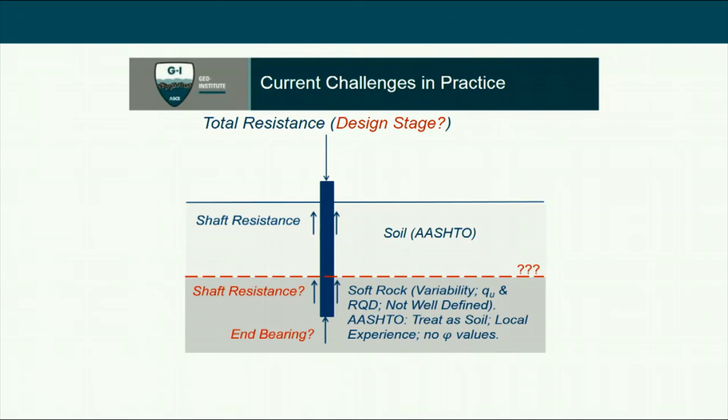This creates challenges if you want to estimate the shaft resistance and end bearing in this IGM material, and creates an unknown at the design stage regarding the total resistance of a pile driven into this geomaterial.

In current practice, the performance of the pile relies on construction control methods, for example using the wave equation, PDA and CAPWAP, or restrike, and maybe even static load tests, to verify the performance of the pile driven into the IGM material. Based on our experience, we found that even with construction control methods, the LRFD strength limit state cannot be satisfied, and that leads to some challenges during construction.

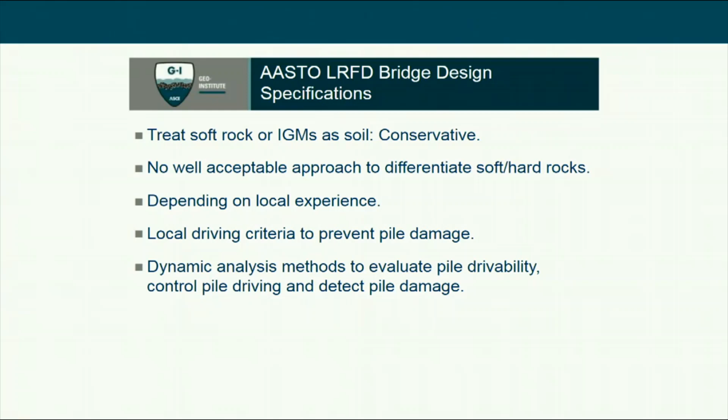We have conducted a literature review. So the AASHTO specifications treat soft rock or IGM as soil material. There is no well-defined, acceptable approach to differentiate soft versus hard rocks, depending on local experience. Local driving criteria are recommended to drive the pile to prevent pile damage. Dynamic analysis methods are recommended to evaluate pile drivability, control pile driving, and detect pile damage.

So we conducted a survey on the state DOTs to determine if any state DOTs in the United States have special provisions to define rock, IGM, and soil materials, especially IGM material. We found that only a few states have some sort of provision to describe IGM, but most states do not have a definition or description of IGM.

For those few states, they have specific criteria, specifically for driven piles. For example, PennDOT defines soft rock based on UCS values less than 1,000 KSF. Montana, again, based on UCS. Iowa DOT relies on SPT N value. NC DOT uses blow counts. SC DOT, again, based on RQD values.

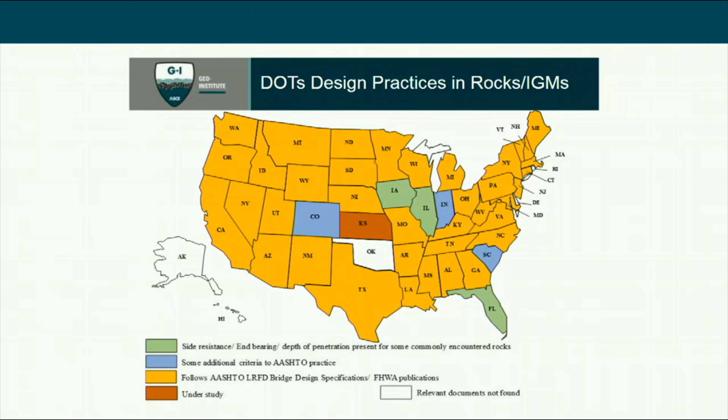In terms of state DOT practice in designing piles driven into IGM materials, as you can see, there's only maybe 3 states that have come up with a method or approach to estimate or provide estimations of pile resistance, and most states will just rely on AASHTO specifications for design practice.

So for those 3 states, like Illinois DOT, they have conducted load tests on selected limited project sites to obtain data and come up with methods to estimate shaft resistance and bearing for the geomaterial.

Iowa DOT has what we call the blue book, which gives recommended values of shaft resistance and end bearing for piles driven into rock material. Florida has their own program that includes estimations for end bearing and shaft resistance in those materials.

Some other states may have additional provisions in addition to AASHTO. For example, CDOT simply says that if your pile penetrates more than 3 feet into the rock, we consider that soft rock; if it's less than 3 feet, then consider it hard rock. But when you have hard rock, the structural capacity will govern the design.

Indiana DOT will limit their nominal resistance to about 65% of the yield strength of steel, and factored resistance to about 46% of the yield strength of steel. So those are their guidelines. South Carolina DOT says that if you have RQD greater than 10%, then we use the structural capacity as the governing limit state equation.

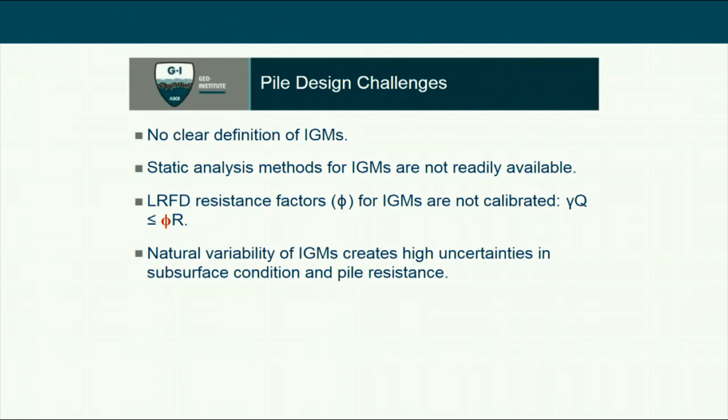So in terms of the challenges during the pile design stage: there's no clear or consistent definition of IGMs. Static analysis methods for IGM are not readily available to estimate resistance. And the LRFD resistance factors for IGM are not calibrated—in other words, there are no recommended resistance factors for this kind of geomaterial, especially since IGM materials are highly variable, which creates a lot of uncertainty in estimating pile resistance.

That leads to challenges during construction because of the limitations in the design stage, resulting in a high discrepancy between the estimated and measured pile resistance. In some cases, you may not have an estimate and just rely on construction control to determine pile performance. Very often, as we see from Wyoming, the LRFD strength limit state could not be satisfied during construction. High uncertainty in pile performance leads to many challenges during construction—possibly higher construction cost and duration, and potential conflict between owners and contractors.

So over the past 4 years, I have gathered data from Wyoming DOT based on projects with piles driven into IGMs. Based on these 15 projects, with a total of 104 production piles, we found that if we use the wave equation as the construction control method at the end of driving, only about 28 production piles satisfy the LRFD strength limit state, or only about 28%.

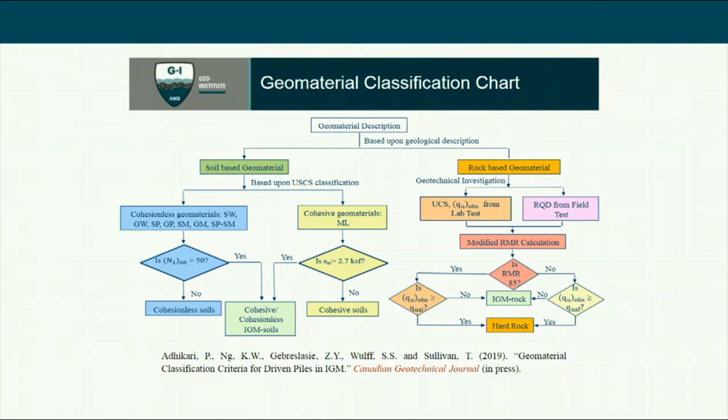If you have a fractured rock with RMR less than 85, then you have to compare the measured UCS versus the QUSF. So with that logic, we're able to determine whether this material is considered an IGM rock or hard rock.

So we have developed a series of charts to determine the QUSI, the limit for the intact rock, to differentiate IGM versus hard rock based on the percent of pile resistance and the pile type.

And we also have developed a series of charts for QUSF to determine the limit of the UCS value based on the RMR value and the percent of total resistance, to differentiate the IGM material versus the hard rock. You can find more about this in our publication in the Canadian Geotechnical Journal.

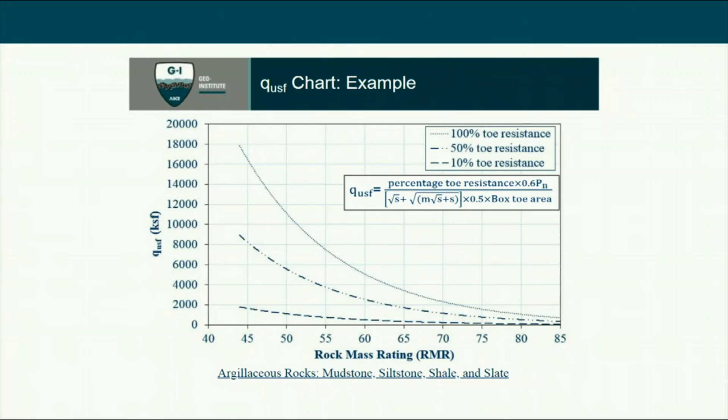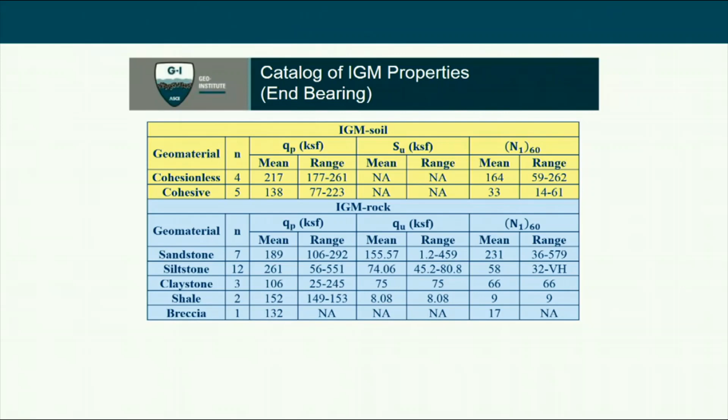So with the data we have from Wyoming DOT, we're able to calibrate some static analysis methods. For example, for IGM soil, we have calibrated the alpha method to estimate the shaft resistance in terms of undrained shear strength. For IGM rock, we're able to calibrate the alpha method in terms of uniaxial compressive strength, and the calibrated beta method in terms of friction angle, to allow people to estimate the shaft resistance based on measurable parameters.

They also developed a calibrated alpha method and beta method for estimating the unit end bearing for IGM rock materials - alpha method in terms of the uniaxial compressive strength, beta method in terms of the friction angle.

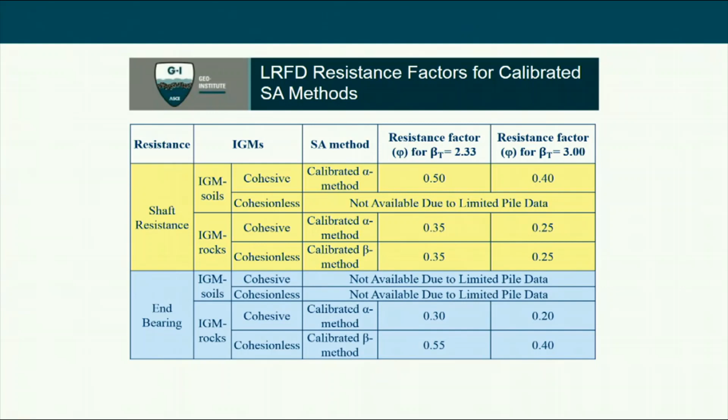With those measurements and calculated resistance, we are able to come up with calibrated resistance factors using FORM and Monte Carlo simulation methods, based on the AASHTO specifications, with a reliability index of 2.33 for redundant pile groups and reliability of 3.0 for non-redundant pile groups. Those calibrated resistance factors are, in fact, reasonable - in some cases better than what is shown in the AASHTO specification.

And also come up with recommendations about how you will use the wave equation analysis program. You have a pile driven into an IGM.

We recommended that if you have a soil material or geomaterial with N160 less than 60, you use the N value as an input. If it's greater than 60 for the IGM soil and IGM rock, cohesionless, you use friction angle and unit weight as input. And for cohesive IGM and soil and rock, we'll use UCS and unit weight as the input to the IGM.

We also consider two cases about how to properly define the toe quake values in the wave equation. Case one is using the toe quake values generated by the wave program, and case two is using D over 120 for IGM soil and 1 millimeter for IGM rock to define the toe quake value.

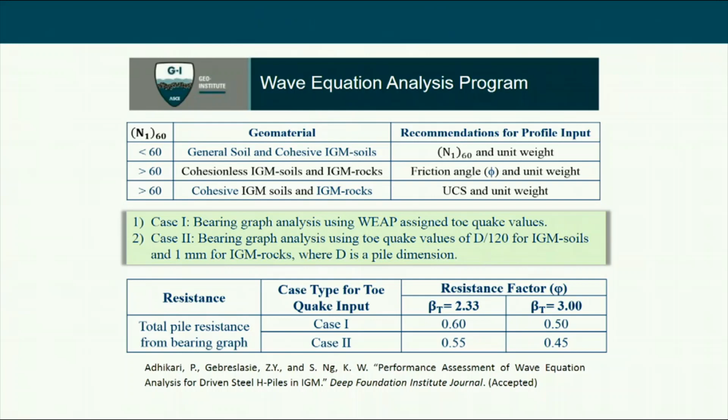We have also come up with calibrated resistance factors for the wave equation for piles into IGM. Case one with 0.6 as the resistance factor, and case two will be 0.55 for the resistance factor.

So those are the study outcomes based on only the Wyoming data. This year we begin a pooled-fund study to expand the study to cover more states, to investigate the pile performance and the recommendation to develop LRFD recommendations for piles driven into intermediate geomaterials.

Seven DOTs participate in this pooled-fund study. This is a study for 5 years, starting this year, 2019, expected to complete in 2023. We hope that with this study, we can provide a better, more representative recommendation to develop the LRFD recommendations for driven piles into IGM.

So if you have any questions, you can feel free to contact me. That's my contact information right there. And also, I have included a list of references here that we have written in the past few years, all about piles driven into IGM materials.

All right, that's all I have. Let's see whether there's any questions. No questions, so to save time, I will move forward to the next speaker.

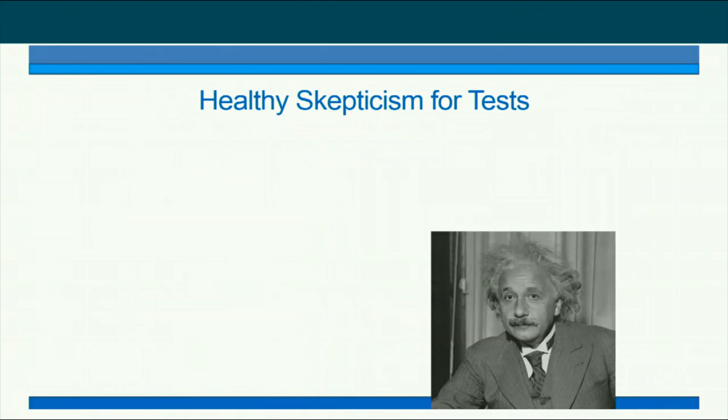But not all tests are equally valid. We have to have a healthy skepticism for tests. Albert Einstein is reported to have said, a theory is something nobody believes except the person who proposed it.

An experiment or a test is something that everybody believes except the person who performed it. You may have some tests like that yourself where you're not sure that everything was done properly, that the strain was measured right, or that the samples were undisturbed. So we have to be careful.

We're looking at a situation where we have abutment piles near MSE wall faces. It used to be typical to have a slope in front of the piles. More commonly now, we have a vertical face, and to keep that stable, we have thin concrete panels reinforced by metallic or geosynthetic reinforcements extending back into the fill material.

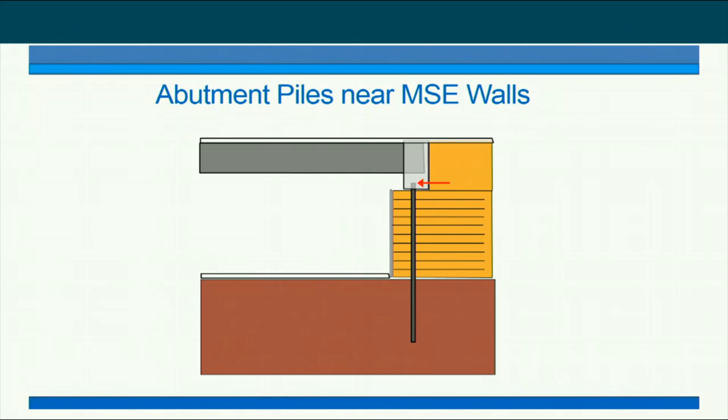Our concern then is, when we're looking at lateral resistance, what kind of resistance would we have, and what kind of displacement and tensile force might we apply to the pile and to the reinforcements?

There's different approaches, as we looked at the 11 state DOTs we're working with, to account for this. The geometry will have H as the effective wall height, the length is the length of the reinforcement, and S is the spacing behind the wall from the back of the pile to the center of the pile, or back to the wall to the center of the pile.

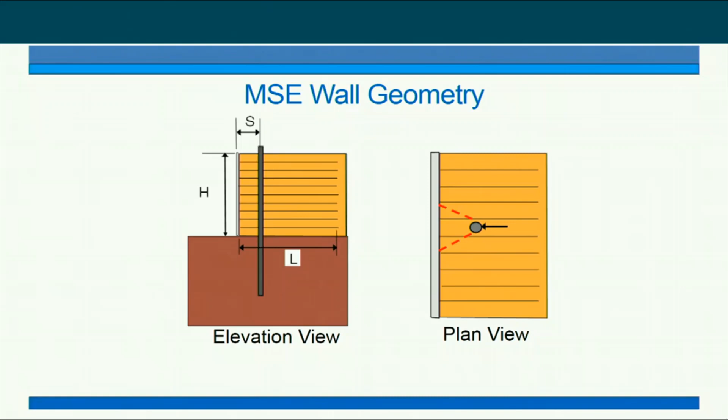Here we're looking at 2 conditions. As the pile is loaded laterally and impinges on the wall, does the wall cause a decrease in lateral pile resistance? And secondly, does the pile load increase the force on the reinforcements? So these are the things we're concerned with.

Different state DOTs have different approaches. Some states like Texas, Florida, and Massachusetts ignore the soil resistance, so you have a flagpole loading. The consequence of that is you have to either have larger piles or more piles, and that in turn increases the cost of the piles for the project.

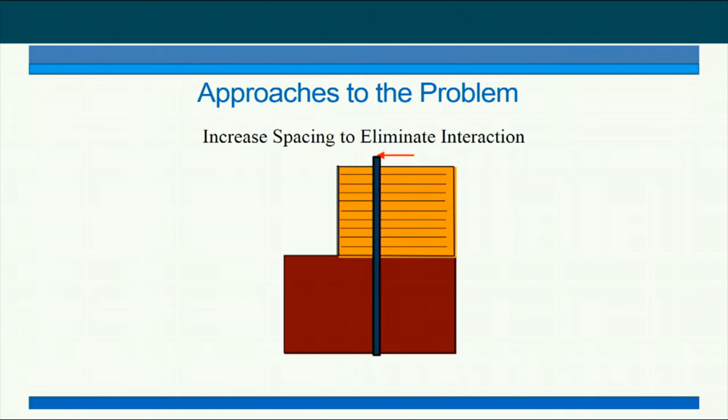Another alternative is that maybe they would say, let's move the pile far enough back from the wall face so that we eliminate the interaction effects. So how far does that need to be? Some people say 6 diameters, 8 diameters, something like this. If we move the piles further back, this increases the cost from a larger bridge span, which can be important.

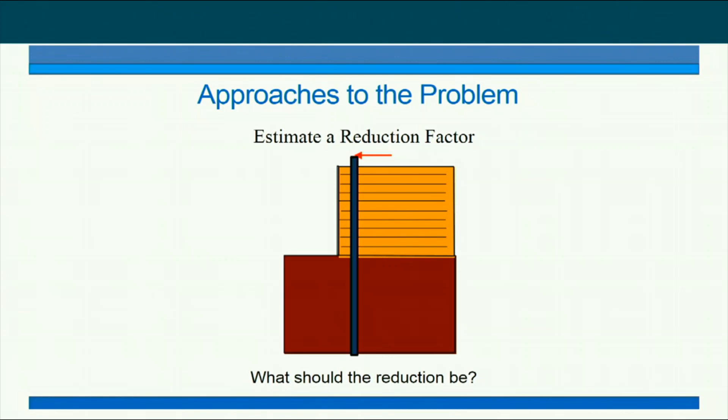Other people have said, let's have some reduction factor that accounts for the reduced lateral resistance you'd have due to interaction with the wall. The question is, what should that reduction factor be? So some of you use finite element modeling and other techniques or judgment to estimate a reduction factor.

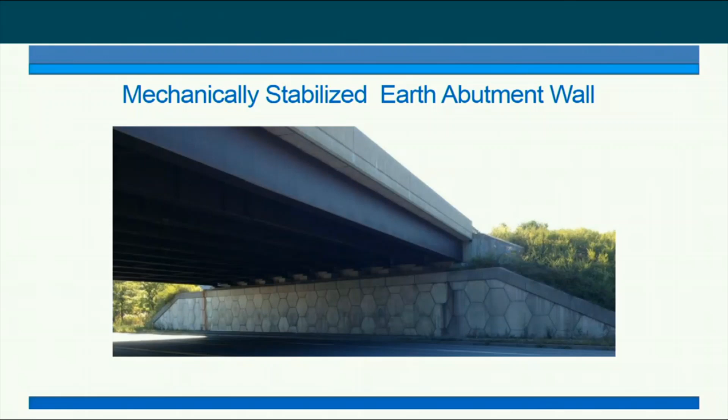It's hard to do things that are under construction, so we tried to find a case where we could actually build our own wall. We're trying to look at a case like this wall in Buffalo, New York, where we have an MSE wall face and the bridge deck with the approach fill located behind it.

So we found a test site in a gravel pit where we could build a wall that was 20 feet high and 100 feet long. We're looking at 24 different tests with round, square, and H piles at pile spacing 2D to 5D behind the wall.

So this is our layout, a comparison of what we would see in the field, where we have an approach fill and the abutment overlying the top of the reinforced section.

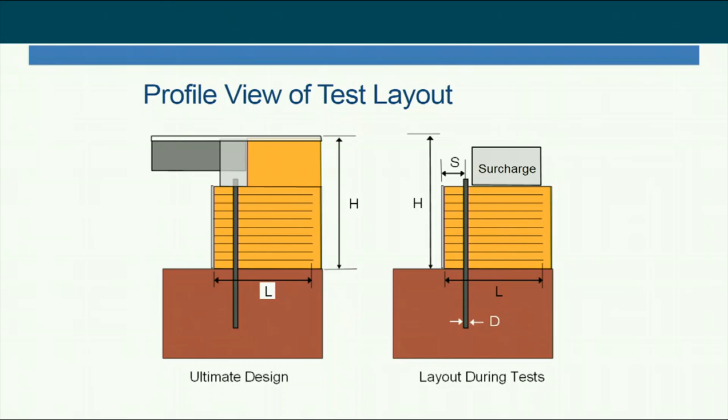In our case, when we're doing the test, we don't have the abutment in place. So to simulate that situation, we're actually putting some surcharge loading to produce about 600 PSF pressure behind the wall to simulate this surcharge weight.

So this is our test foundation, and we are putting the surcharge back behind the wall, or behind the piles that we're testing. The piles in our case extend 20 feet below the base of the wall, so they're long piles, 12 inches in diameter.

This is a cross section through the geometry of the pile. We've got the surcharge placed here, and the reaction piles are located behind the reinforced section so that they don't have any impact on the lateral resistance. Then we are applying load like this to move the pile towards the wall face.

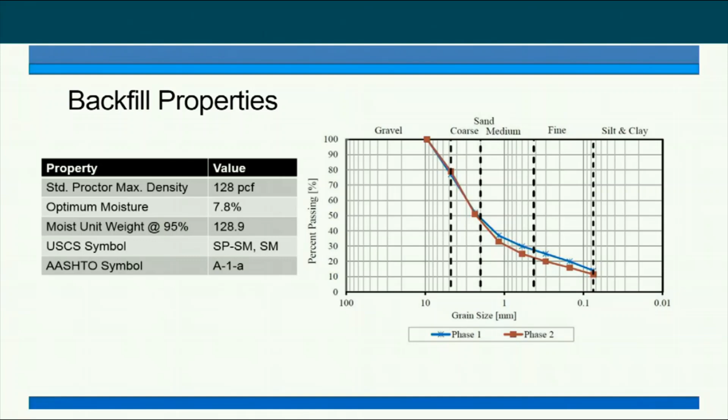This is the plot of the backfill properties. We've got maybe 20% gravel, 60 to 70% sand, and maybe 10 to 12% fines in the mixture, non-plastic silt.

We are doing the test geometry in this arrangement. On one side of the wall, we have rib strip reinforcements; on the other side, wire mat or welded wire reinforcement. All the piles are about 12 inches in diameter, pipe piles, H piles, and square piles. In this case, they're made of steel so that we don't have variations in interface strength.

So what we did is built the wall up to 15 feet in height, and for the effective length on the reinforcements, which are 18 feet behind the wall, we have an L over H of about 0.9. So we did tests here with walls with piles.

We did the test on piles way behind the wall first, and then we did tests on the round or circular piles behind the strip reinforcement, and another set of tests behind the walls with the piles in the welded wire reinforcements.

Then we did tests with piles on the H piles. Then we added another 5 feet of soil, another wall panel.

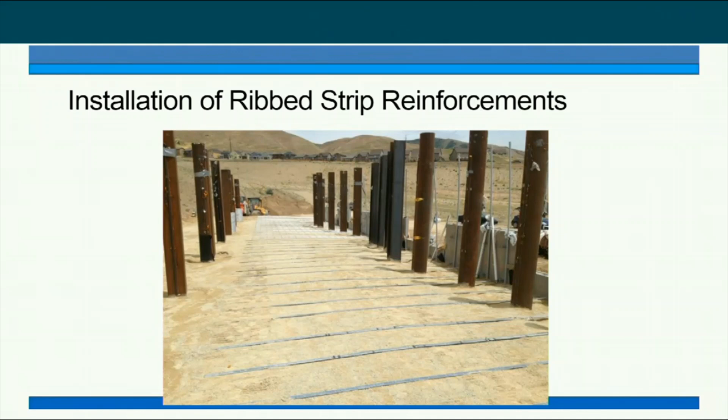Here's a photograph of the rib reinforcements. We have the strain gauges going along the length of the reinforcement, so we can look at the distribution of load in the reinforcement. We also have reinforcement at different distances transverse to the loading, so we could look at the effect of reinforcement load at different locations.

Here's the welded wire reinforcement. This one had strain gauges close to the pile, and this was further transverse to the wall.

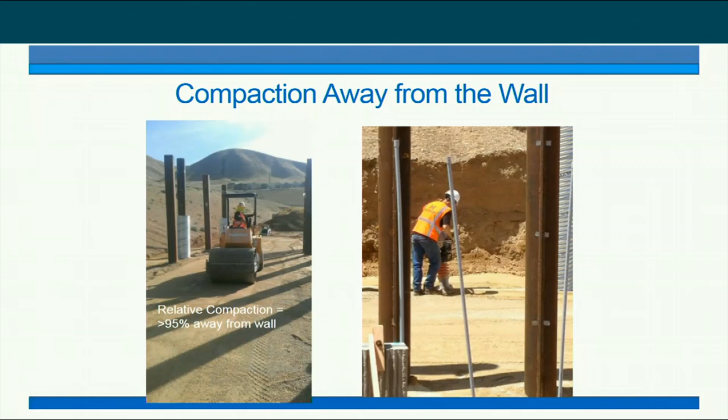Here we did the compaction. We could use a roller compactor device, and we got 95% of standard Proctor away from the wall. Near the wall face, it's very typical to limit your compaction to a plate compactor, and more typically then we got 88 to 94% near the wall face, which is more typical of practice in constructed works.

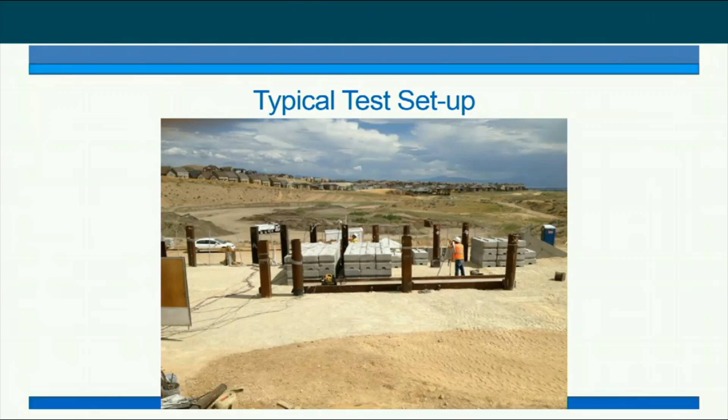This slide shows the test setup, and you can see here we have a reaction beam back behind the reinforced section. You see also the reaction piles. These are the precast concrete blocks stacked enough to give us 600 psf pressure.

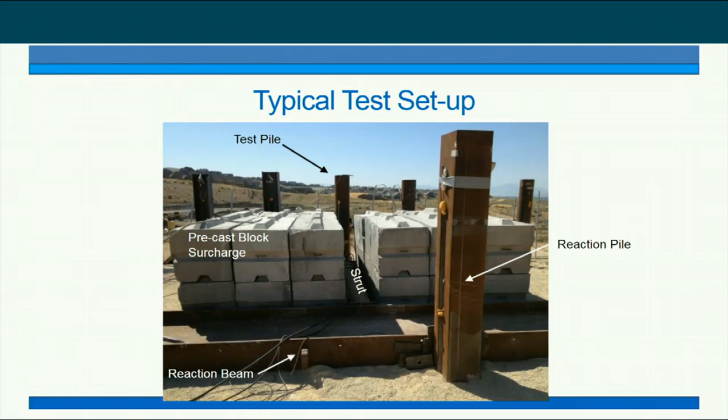And then on this next slide, you'll see a little closer view. There's a strut placed between the reaction beam and the pile, and then as you move closer, there's a pin connection at the top so that we load that with a known geometry, a known pile head geometry at the top.

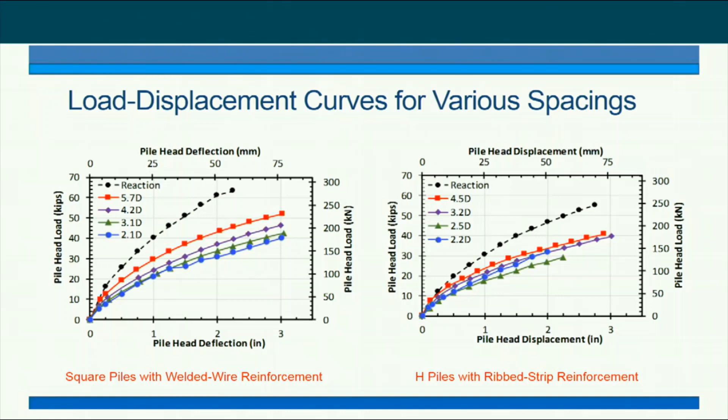As we get closer to the wall, we see a reduction in lateral resistance relative to the piles back at 5 diameters away from the wall.

We plotted the maximum displacement anywhere on the wall using red dots from the DIC system, along with string pots on top of the wall. The average of the maximum displacements for a 1-inch pile head deflection was about 1/10 of an inch, pretty little. Even at mean plus 2 standard deviations, the maximum wall displacement was about 0.25 inches. At a pile head deflection of 3 inches, the average maximum displacement was about 0.3 inches, and mean plus 2 standard deviations was 0.6.

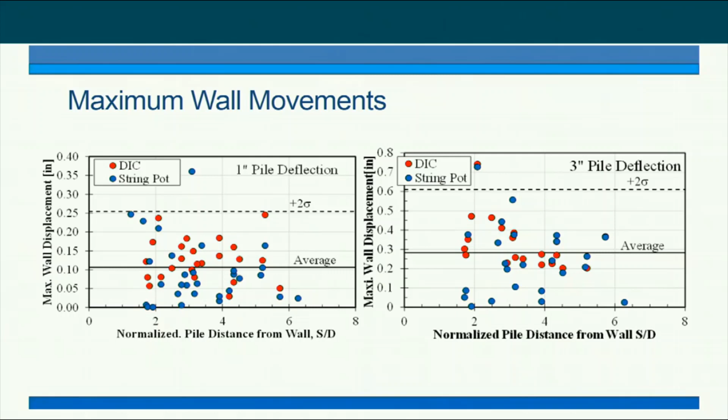It's interesting to contrast that with the geosynthetics, where we saw 2 inches of displacement with that much more flexible system. With the steel reinforcements, we're getting much less deflection at the wall head.

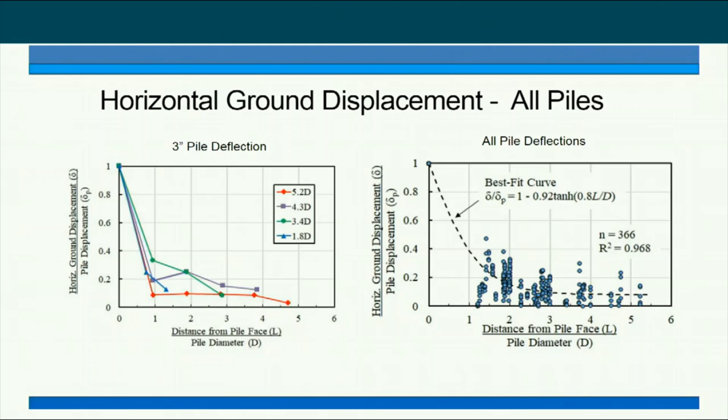This shows a plot of the horizontal ground displacement behind the wall. As we move out from the pile face to about 3 or 4 diameters, the ground is moving very little relative to what it's moving at the pile face. This suggests that at about 3 or 4 diameters, the wall starts to have very limited effect on the lateral resistance of the piles.

First we calibrate our lateral pile analysis with L-pile, getting agreement with the load versus deflection curve for the pile spaced at 5.2 diameters behind the wall. We lock in all the soil properties for that case, then derive the P multiplier that allows agreement with the other load deflection curves. At 4.3 diameters, the P multiplier is 0.95. At 3.4 diameters, it's 0.7. And at 1.8 diameters, it's 0.3.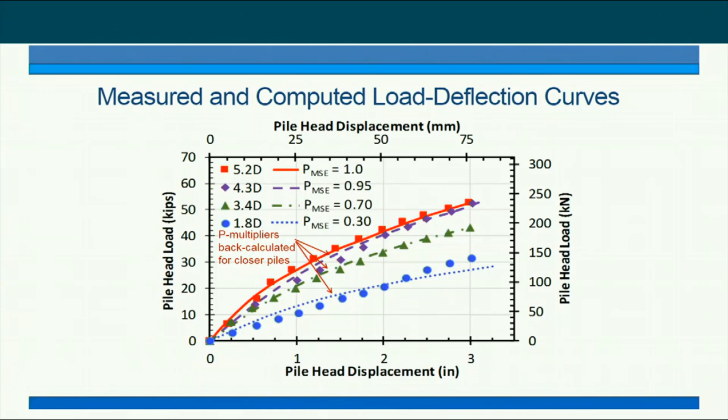We had 5 different graduate students working on this at different groupings of piles, and I was interested to see what they would come up with for their back-calculated friction angle. It turned out to be around 38 or 39 degrees, and fairly consistent.

So then what we did is plot all these P multipliers for the various tests, and you can see that once we get to a spacing back from the wall of about 4 diameters, the P multiplier is 1, indicating there's no effect of the wall interacting with the soil, or that the reinforcements are keeping the soil in place so we have no reduction in lateral resistance.

If we get closer than 4 diameters, the best fit curve shows a linear reduction in the P multiplier with distance. So with a curve like this, a designer can determine whether it's better to put the piles closer to the wall and deal with the lateral resistance decrease, or put the piles further back from the wall and increase the bridge span.

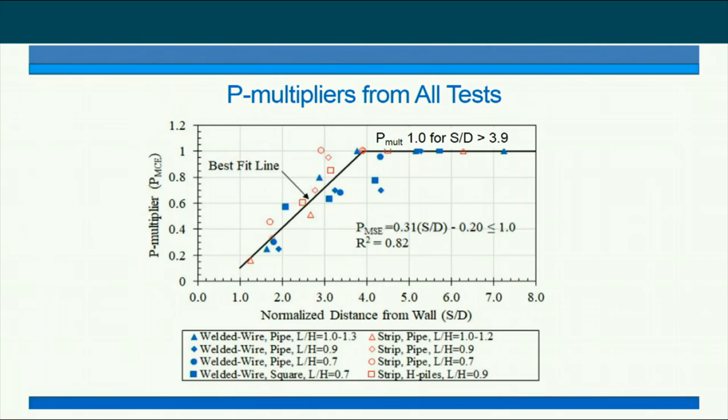We were also interested to look at the effect of the different types of reinforcements. If we look at ribbed strips or welded wire, there's no consistent trend you can discern, so they're not affected much by the reinforcement type. They're both designed according to the AASHTO code, so that might be reasonable.

In the next case, we're looking at the effect of the L over H ratio, and it doesn't look like they're significantly affected by the L over H ratio for the geometries and loads we're looking at, which is good for us.

Lastly, we'll look at induced forces on the reinforcements. This is a complicated soil structure interaction problem. We're looking at interaction between the pile and the soil, the pile and the wall, and the reinforcements in the soil. There are a number of important factors here.

As we increase the force on the wall, or force on the pile, the tensile force on the reinforcement increases, and of course that makes sense.

And instead of being maximum at the wall face, they're maximum basically at the location of the pile itself.

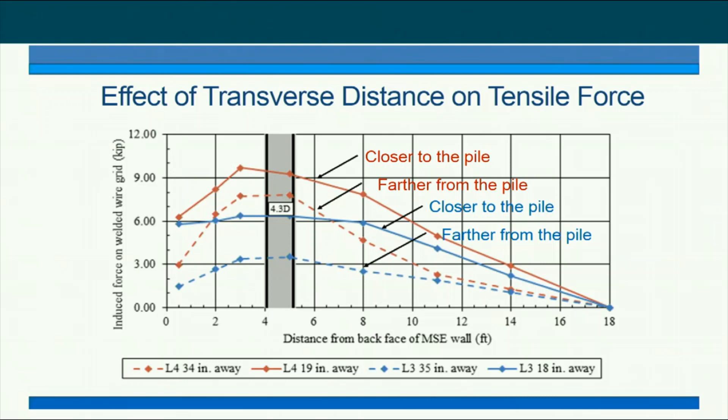Let's go down to another depth. Closer to the pile, we have higher tensile force in the reinforcement, and further away from the pile, we have a reduction in the tensile force. So we need to consider the transverse spacing in our analysis.

So what we think is happening here is that as we're loading the pile laterally, we're pushing the soil in front of the pile, and that's inducing soil movement to the left.

Pushing this, we're inducing a displacement towards the left relative to the reinforcement, and this causes skin friction moving towards the wall, which increases the tensile force in the reinforcement and gets the maximum at the pile location.

If we look behind the wall, the reinforcement is moving left relative to the soil, and acts as an anchor. That induces friction towards the right on the reinforcement, which decreases the tensile force in the reinforcement and gives us the shape we're seeing in the measurements.

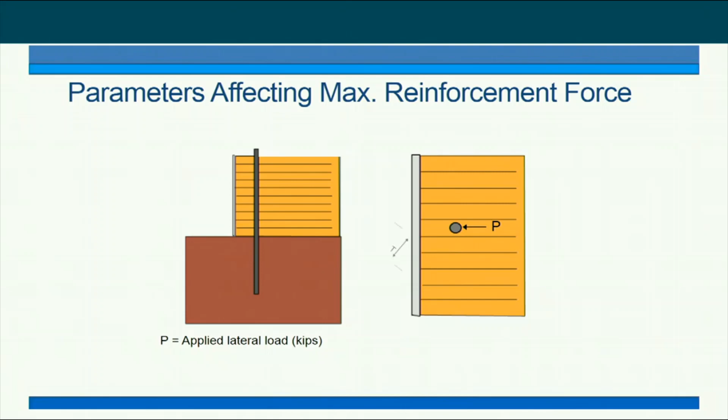So we're looking at factors affecting reinforcement, and there appear to be a number of them: the lateral applied load, the transverse distance, the vertical spacing behind the wall, and the applied vertical stress on the soil. We're going to have to consider those factors.

So we did a regression and found that for the rib strip reinforcements, there are three factors primarily influencing this: the lateral force, the normalized transverse distance, and the spacing behind the wall. If we plot those all up, you can see this curve, which shows the best fit agreement.

The equation is accounting for about 70% of the variation that we see here. We've also plotted standard deviation bounds, so if you wanted to use a higher force to predict the capacity, you could do that.

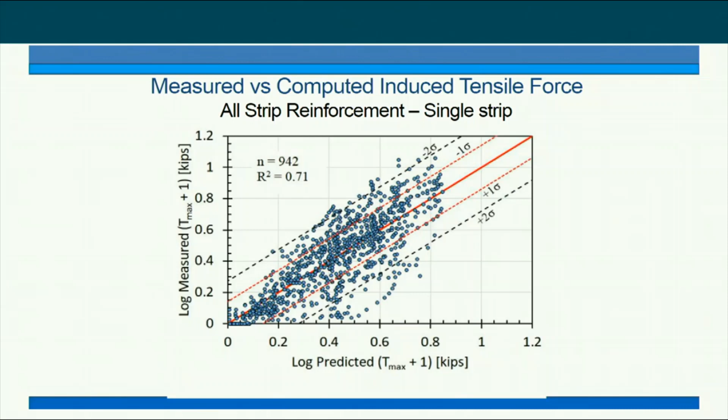We've also done regression for the welded wire reinforcements, which has to be different because they have a different mechanism. We're again looking at the lateral force, vertical stress, and transverse distance, computing the induced force due to the applied load. Here again, we're accounting for about 70% of the variability, and most points are in a fairly narrow band, but for 1,000 data points, you can see the variability that we have.

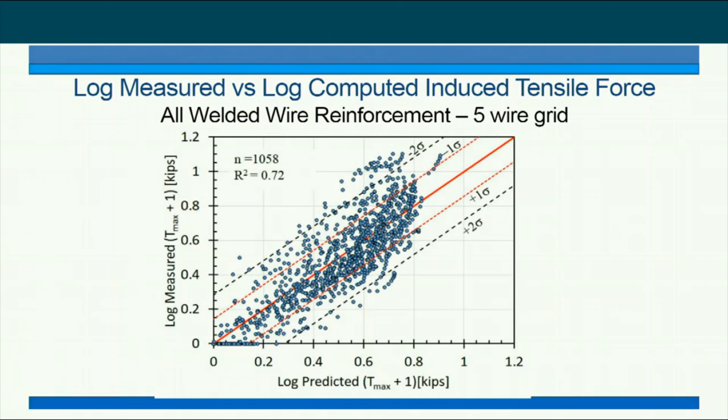We found this quote on the internet from George Box, an eminent statistician, who said: all models are approximations, as we have to recognize, and that essentially all models are wrong, but some are useful. You also have to consider the approximate nature of the model when you're using it. Considering there's no other approach available to give us this capacity, we think we're doing quite well. We can account for a lot of the variability that's going on, but it's only an approximation at present.

Now, most of these quotes that I've been giving you come from the internet, and I found this quote from Abraham Lincoln on the internet, suggesting the difficulty of relying on quotes from the internet. I hope all these quotes are valid, but they may not be.

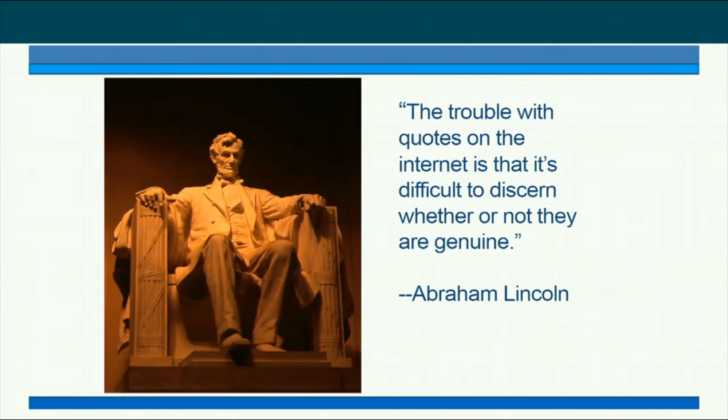So let me conclude with these comments. We can see that there is significant reduction in lateral resistance when piles are placed closer than maybe 4 diameters from the back of the wall. We found that a simple P-multiplier approach can account reasonably well for the reduction in lateral resistance that we're seeing. You can use a P-multiplier of 1 for spacing greater than about 4 diameters, and it decreases linearly for smaller spacings with this simple approach.

With respect to the reinforcement force, it is a maximum near the pile itself, and occurs near the pile. It increases with applied load, it increases as the pile is placed closer to the wall, and it decreases with transverse distance from the pile.

Our statistical regression equations can account for about 70% of the variation that we see, so it's actually as good as a lot of the models we use in geotechnical engineering, and better than most. Finally, at the maximum pile load, wall deflection was typically less than 0.3 inches on average in the tests we've conducted to this point.

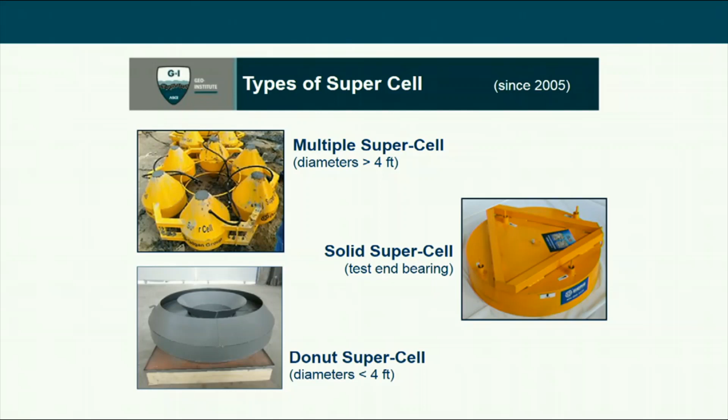The device itself is secured within the steel reinforcement cage, and as mentioned, eliminates the use of large bearing plates. Also important is there's an outer shell incorporated in the design, where the pressure cell, the actual guts of the unit, is inside that shell. The shell protects the unit from any damage due to fabrication, lifting, placement, or anything during installation, and also provides a surface to which other components can be welded or attached, so welding does not occur directly onto the pressure cell itself.

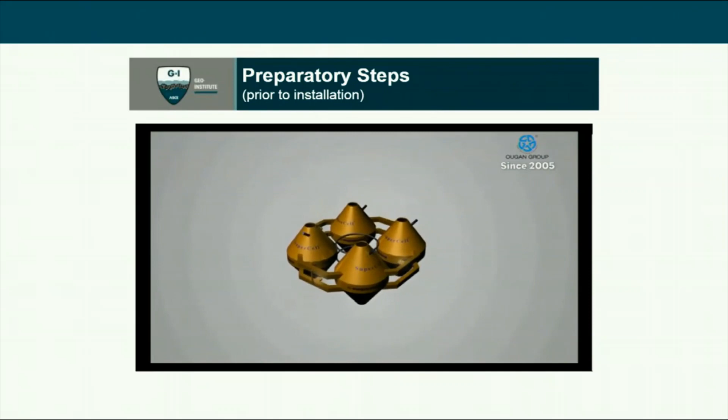So this slide is a short video, about 2 minutes long. There's no audio, I'll be speaking along with the graphics and animation. Prior to attaching the cell to a rebar cage, the inner space or annulus must be filled with concrete and allowed to harden.

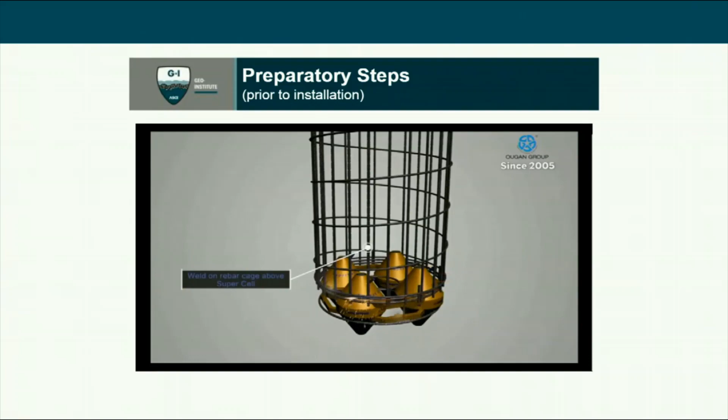The concrete is rodded and vibrated to ensure the void or opening is fully compacted and filled, typically left overnight to harden or set. Both sides need to be done. The infill concrete placed within the annulus is used to transfer the load from the cell outward to the shaft efficiently, so you're utilizing this as one composite unit and not as a couple of distinct pieces.

After the concrete has hardened or cured, the rest of the attachment to the rebar cage can be performed, and the instrumentation can be added. As already mentioned, there is no direct welding to the pressure cell itself.

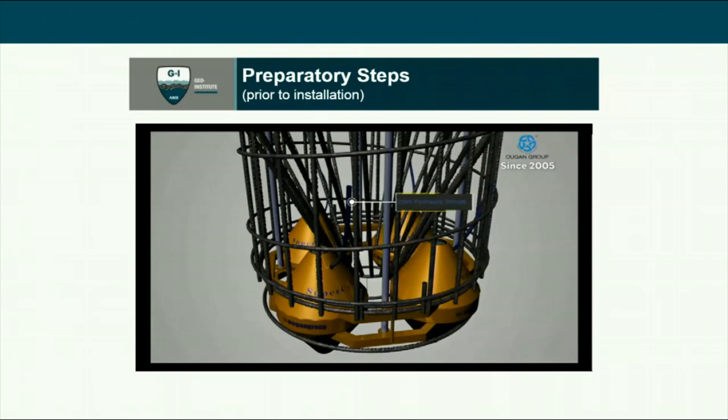Above and below each supercell, as we see on the graphic right now, there's something called horn rebar or funnel reinforcement, which are those diagonal bars. These are utilized for a couple of functions: to increase structural stiffness to the reinforcement cage itself, as a means to help distribute the applied load from the cell outward to the shaft, and to act as a guide to ensure the tremie tube gets through the device to the depth required.

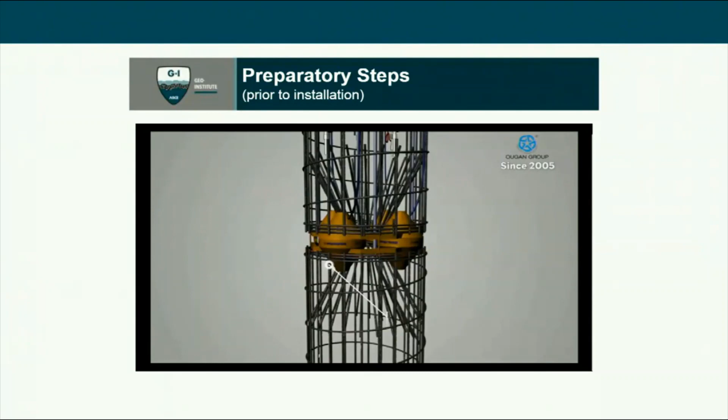After the horned reinforcement is installed, all the other embedded instrumentation can be attached: telltales, strain gauges, fiber optic cables. In the last part, which we'll see here in a few seconds, the pitch of the spiral reinforcement is also tightened up above and below a distance of about 6 or 7 feet, a couple of meters, to provide additional confinement or stiffness around the testing jack itself.

Now it's ready to be lowered into the hole and the testing performed. The other part to keep in mind is that, similar to other devices, grouting can be performed of the space or opening created due to the testing itself. The tubes used to pressurize the hydraulic jack can be removed, grout tubes can be installed, and then grouting of that space can be performed.

Now let's get into a case history showing results of what was performed on this bridge. The Jiashao Bridge is currently the world's longest and widest multi-pylon cable-stayed bridge in service. It connects the cities of Jiaxing and Shaoxing, and was commissioned to help alleviate serious traffic congestion, decreasing drive times from multiple hours, sometimes 6-7 hours, down to about an hour and a half across the Hangzhou Bay Bridge. Hangzhou is a couple hours southwest of Shanghai.

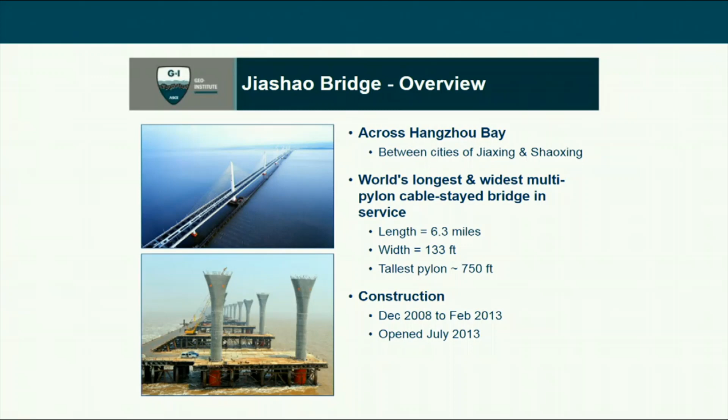The bridge has 2 main structural systems, with the center portion allowing a big expanse, big open avenues for traffic along the river to get through. The center portion of the bridge is supported on 6 pylons about 745-750 feet tall. The outer ends are supported by 2-column piers, as we see in the lower left photo.

Okay, getting into the geotech and then walking ourselves into the testing.

Such a bridge, such a structure required quite an extensive site characterization program for the portion within the river itself. The site characterization was performed to establish the engineering design properties. The work was done through 2 stages. A total of 27 boreholes were drilled, with over 10,000 linear feet of drilling performed. 57 rock samples, almost 600 undisturbed soil samples, another 400 plus disturbed samples, over 600 dynamic penetration and standard penetration tests were performed, as well as some geophysical work.

What came out of it, and we'll see in the next slide, the topography of the bed of Hangzhou Bay is relatively flat. Water depth ranges anywhere from 15 to about 35 feet. The other thing that really stood out was the designers had computed extremely deep scour depths, ranging anywhere from 85 to 125 feet, depending on where the borings were taken. The upper layers are extremely or highly erodible, especially during the heavy rains and pursuant flooding that happens there.

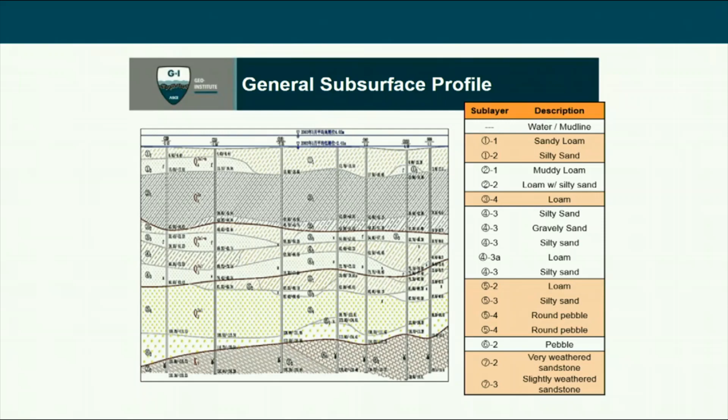In general, the topography is relatively flat, as already mentioned. There are pretty well 3 main landforms: an alluvial plain, an intertidal zone, followed by an underwater depression. The bottom of the piles, for the most part, especially here at the test pile location, tip into the slightly weathered argillaceous sandstone, which is layer 7.

Okay, getting into the test pile, the nitty-gritty of why we're here. To support the required loading, both for the test pile as well as for the main elements of the bridge itself, the designers had estimated that a 12.5-foot diameter drilled shaft, and in this location for the test pile, length about 355 feet was required.

Okay, so let's look at some of the details for the test pile itself. The test pile was a sacrificial pile, done off to the side and not incorporated into the work. The results of the testing were used to confirm the design assumptions and estimated resistances. They were not used to go back and redesign to shorten anything, such a signature bridge. They wanted as much reserve in the pocket as possible.

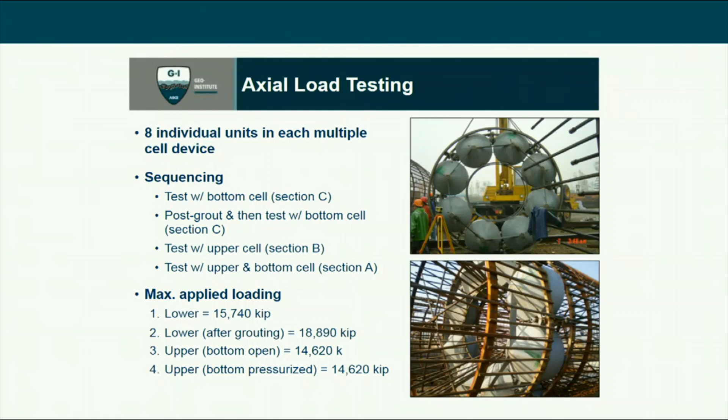Now looking at the upper cell, depressurizing the lower, so now utilizing the 2 lower sections, reacting against the upper section, evaluating the side resistance. Then after waiting another 5 to 7 days, they pressurized the bottom cell and performed the testing again using the upper cell to evaluate the section of shaft above that upper cell. So it was a pretty complicated series of testing performed at this site.

Okay, so let's look at some results and see what happened or what was noticed. The figure on the left-hand side shows the load displacement relationships for the results based on testing using the lower cell only. The black line is pre-grouting, the blue curves indicate the tip post grouting. This is that first and third sequence of that 5-step process.

So let's see what we have. During the first set of tests, a load of about 15,700 kips were applied. After the tip post grouting, the loads that were applied were 18,900 plus or minus. What was seen? We can see that geotechnical capacity was achieved due to that plunging failure or plunging motion under sustained loading. We could see that for both types of shafts.

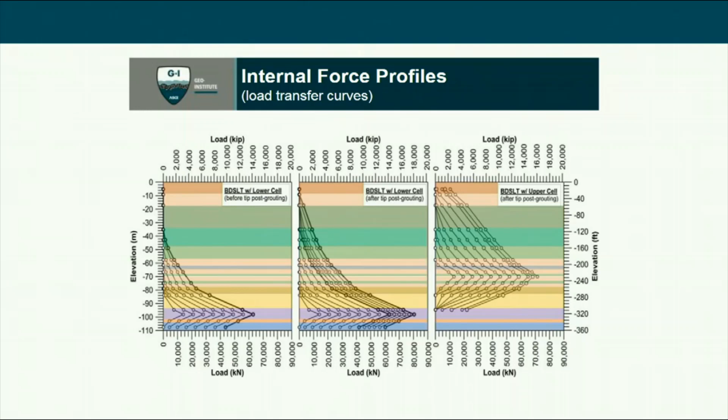Not getting into the nitty-gritty of every single elevation, let's just look at some of the TZ responses, or unit side resistance versus relative movement, at the distinct distances between strain gauge elevations, seeing what was mobilized and what was not.

So the two on the left are looking at the lower cell before post-grouting and after post-grouting. Side resistance of only the lower portions of the shaft were fully mobilized—the load cell was buried deep into the length of the drilled shaft, so that stood out.

Due to the tip post-grouting, not only was the side resistance fully mobilized below about elevation 300, but there was also an increase in side resistance below about elevation 310 to 320, and that was likely due to the tip post-grouting.

We could not separate the effects of what they were attributed to, but it could have been possibly due to upward migration of grout during the operation, or maybe some other ground improvement effects, such as an increase in diameter, or maybe some binding of that sandstone material itself.

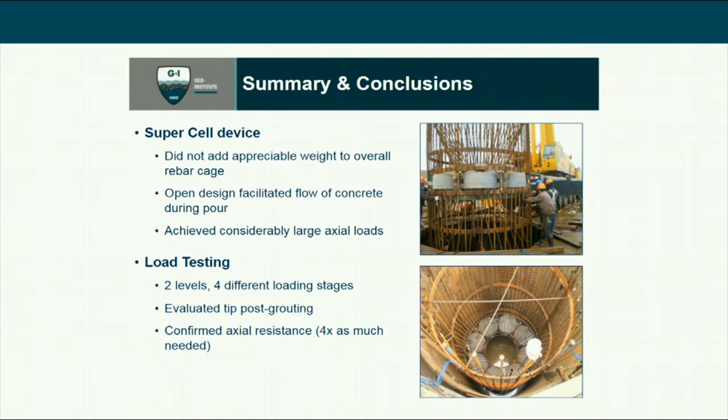For the load testing, there were two levels of bidirectional tests performed, with four different loading stages, including performing tip post grouting. At the end of the day, the testing confirmed considerable axial resistance in that formation, about four times as much as required by the design of the bridge structure itself.

So everybody was happy, the bridge is in operation, and that is all I have for you today. Thank you very much for your time.

All right, thank you, Tony. I'll move on to the next speaker. Murad, can you begin the presentation? I cannot hear you. You hear me now? Yeah, I can hear you now. Oh yes, okay, sorry, okay.

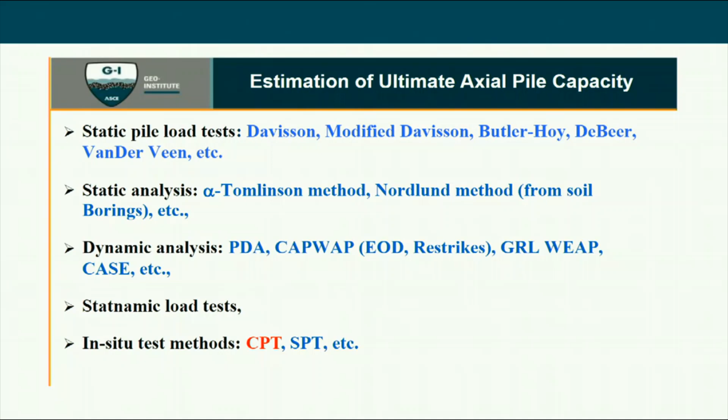And static load tests. The most important thing, which is the topic of my presentation today, is using in-situ test methods such as cone penetration testing, piezocone penetration testing, and standard penetration testing to evaluate the ultimate pile capacity of piles.

So just a review about the cone and the piezocone. The cone is a cylindrical shape with a cone tip, usually with an apex angle of 60 degrees, that penetrates at a rate of 2 centimeters per second. During penetration, if it's a cone or friction cone, we can measure tip resistance and sleeve friction continuously with depth using a pushing mechanism inside the track.

If it's a piezocone, we can measure pore water pressure at different locations depending on the position of the transducer or filter for the pore water pressure measurements. It could be at the tip, which we call U1, or behind the base, which we call U2. The standard cone usually has a base area of 10 square centimeters, sleeve area of 150 square centimeters, with an apex angle of 60 degrees.

Before we go into pile capacity, once you get the raw cone tip resistance data, we have to correct this data due to the design of the cone. There is pore water pressure developed behind the base, U2, so we have to correct all our data using the measurements behind the base and also based on the cone area ratio, AN, the net area and total area, as shown in the figure. We use this equation to correct the tip resistance before using it for evaluating soil properties or for other applications such as estimating the ultimate pile capacity of any type of pile.

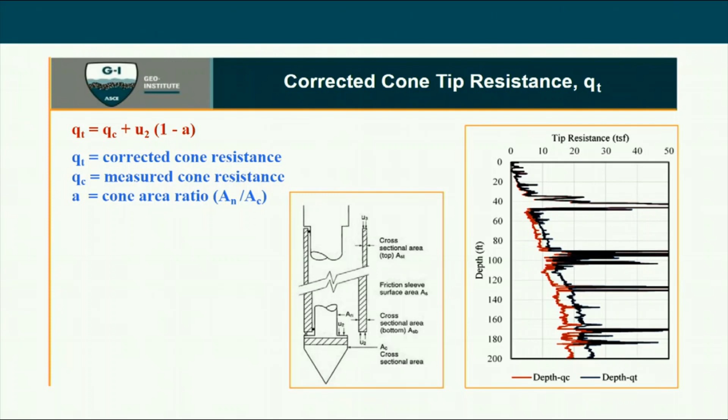The ultimate capacity of the pile is composed of two parts: the end bearing capacity and the shaft frictional capacity. The end bearing capacity is the unit end bearing capacity multiplied by the tip area, and the shaft frictional capacity is the summation of the side resistance along the pile across different layers, calculated as the unit side resistance multiplied by the area of each layer along the pile shaft. This is how we calculate the pile capacity.

Now we have the CPT on one side and the pile on the other side. Due to similarity between the cone and the pile, we can consider the cone to be a simple mini pile. That means there may be some correlation between the CPT parameters, basically sleeve friction and tip resistance, and the pile design parameters.

The correlation between these two, as you see in the next slide: we have the cone data on one side, FSA and QTA, which when you calculate side resistance, you have to average per soil layer. So we get these parameters, plus the unit tip resistance and sleeve friction profiles, and we need to calculate the end bearing capacity and unit side resistance of the pile. So we need the link between these.

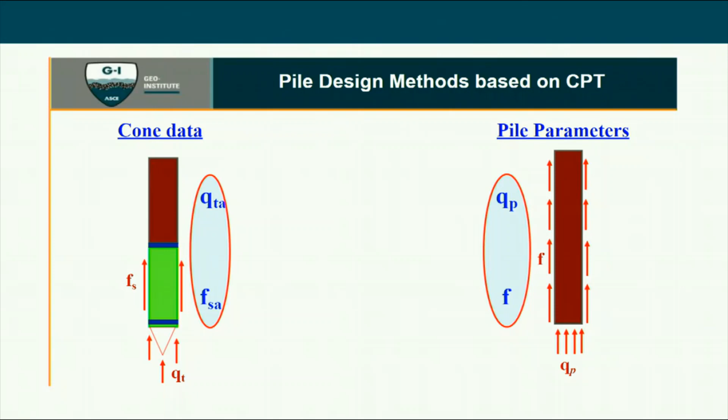So the link is soil type. We have to identify the soil type and classify the soil layer along the profile of the pile, and use this in our estimation of the pile design parameters. In addition, we also need the pile type and installation method.

In estimating pile capacity from CPT, there are two well-known approaches: the indirect approach or the direct approach. In the indirect approach, we use the CPT data to evaluate soil strength parameters such as undrained shear strength and angle of internal friction, and use this as input for static analysis methods, such as the alpha method for clay and Nordlund method for sand.

Or we can directly evaluate the pile design through direct correlation between the CPT data - tip resistance, sleeve friction - and the pile unit tip resistance. This is always evaluated using the cone tip resistance, while the pile side resistance can use friction, sleeve friction, or cone tip resistance depending on the method, as you'll see in some of these summaries.

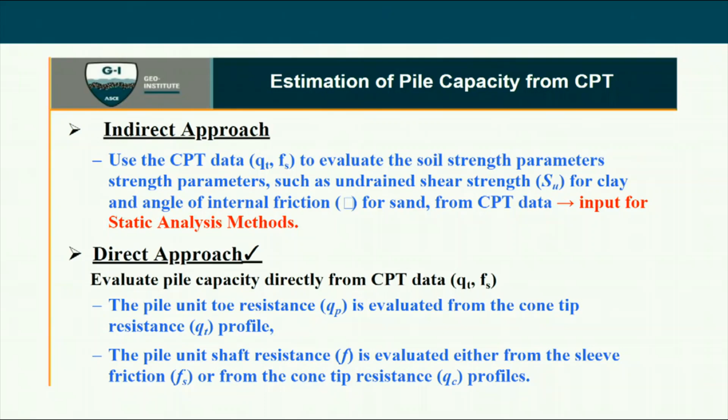The main difference between these methods is the use of different correlation factors and different zones for the tip, for different soil types, different pile types, and different installation methods. And as I said, also different influence depths to calculate the unit end bearing capacity.

In our investigation, we collected 21 direct Pile-CPT methods from the USA and international Europe. Some of these are similar or slight modifications of previous ones - for example, UF, the University of Florida method, is a slight modification of Philipponnat, and UWA and CPT 2000 are very close. But we evaluated all 21 plus the static method, to get an idea how to calculate pile capacity from the different Pile-CPT methods.

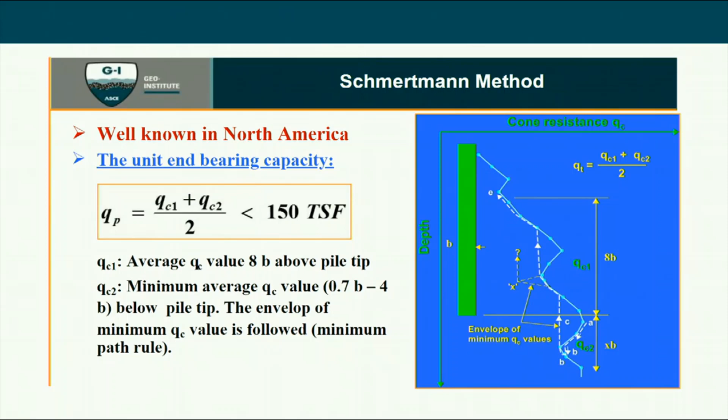What they do is calculate the average QC1 over a range 8B above the pile tip, and QC2 between 0.7B to 4B below the pile tip. They also use the minimum path rule, meaning no point above a certain point will be larger in value than the point below. Based on this, you calculate QC1 above and QC2 below, average these two zones, divide by 2, and impose an upper limit of 150 TSF for end bearing capacity.

Now, for calculating the side resistance, they have two different charts - one for cohesive soils, one for cohesionless soils. For cohesive soils, they call it alpha, which is a function of the penetrometer sleeve friction and whether the pile is steel or concrete. For sand layers, alpha in the equation to calculate unit side capacity is a function of pile depth to width ratio, D over B. In both cases they impose an upper limit of 1.2 TSF for the maximum unit side capacity.

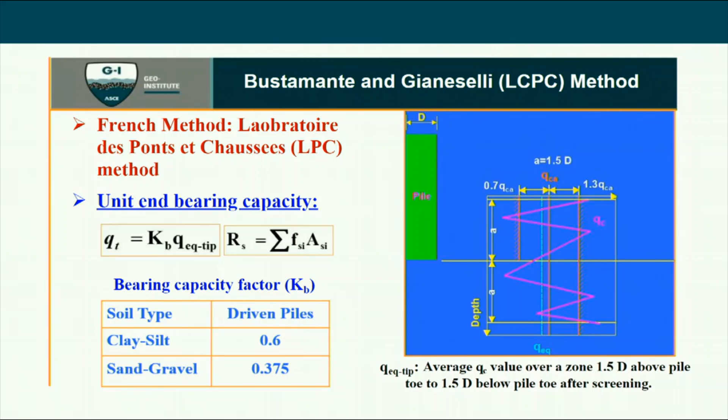Now, for LCPC method, or the French method, they use the tip resistance to evaluate both the unit end bearing capacity and the unit side resistance. To calculate the unit end bearing capacity, their influence zone is 1.5 D or B above and below the tip. They calculate the average and exclude any data greater than 1.3 QC average or less than 0.7 QC average, then they calculate what's called Q equivalent for the tip within this zone for the remaining data. Once you calculate this value, they apply a bearing capacity coefficient, which is a function of soil type and pile type. For example, for driven piles, for clay it's 0.6, and for sandy gravel 0.375.

Now, LCPC also uses the tip resistance to evaluate the unit side capacity. They calculate the average value per layer along the shaft length, and divide it by a factor called KS. This KS friction coefficient is again a function of soil type and pile type, but for driven piles it goes between 30 for soft clay to 150 for compacted very dense sand. The difference here between the other methods is that in LCPC, their Fmax, or the maximum value of unit side resistance, is not 1.2 TSF similar to other methods, but it's a function of soil type, pile type, and installation procedure. There is a table that guides you to which curve to use in these two charts, for clay, silty, and sandy gravel, also based on soil classification, some for cohesive soil, some for cohesionless soil.

Now, for Philipponnat, the same as LCPC, they used only the tip resistance to evaluate both the unit end bearing capacity and unit side resistance. And they impose, again, 150 TSF for end bearing at 1.2 TSF, similar to Schmertmann and De Ruiter. The difference between this and Schmertmann is the influence depth here is 3B above pile tip and 3B below pile tip. They also multiply by a coefficient, K sub B, which depends on the soil type, for example 0.4 for sand and 0.5 for clay. While for evaluating the side resistance, there are two coefficients, alpha and Fs. Alpha depends on the pile type, equal to 1.25 for precast concrete piles, and Fs is a function of soil type, which goes from 50 to 200, from clay to dense sand layers.

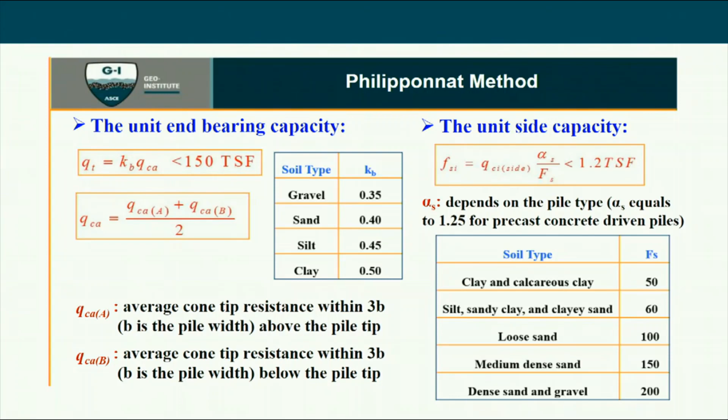Now, UF, as I said, is a modification of Philipponnat. They made three different modifications. One, they increased the coefficient K sub B for clay from 0.5 to 1, and they introduced two types of materials, well cemented sand and lightly cemented sand, for both the unit end bearing capacity and unit side resistance. They give two factors, 0.1 and 0.15 for KB, and 250 and 300 for Fs. The other modification is that Philipponnat goes 3B above pile tip and 3B below pile tip, but for UF, they extend the average cone tip resistance to 8B above the pile tip, which is similar to the influence zone adopted by the Schmertmann method. What they say here is, in case QCT is greater than QC1, then we use QCT equal to QC1. In other words, the pile capacity of the zone above the pile tip should not be greater than the average QC below the pile tip within the influence zone of 3B.

This gives you an idea about how we do the calculation, but everything will actually be implemented in a software or Excel sheet solver. As I said earlier, all these correlations depend on soil type and pile installation. Pile type is going to be easy to evaluate, since we know what the pile type is in our design, and we know the installation method. We need a mechanism or classification methodology to evaluate the soil type along the shaft and also within the influence zone below the pile tip. So in our research here, we adapted two CPT soil classification methods, and the reason we adapted CPT soil classification methods is because these are easy to implement into the software, so it doesn't need much work.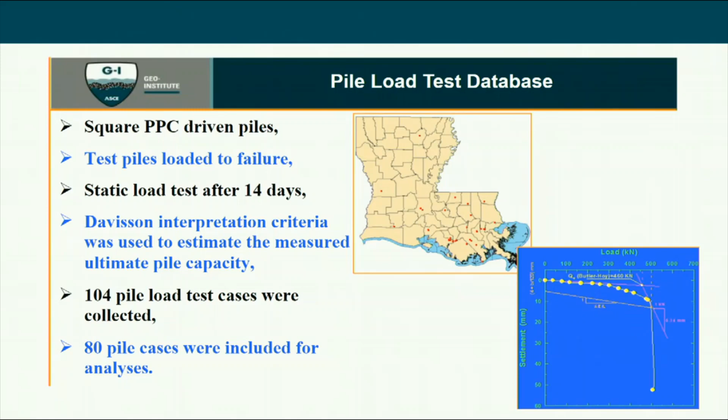To evaluate the different CPT methods, we adopted 3 different criteria. The first one is evaluation based on mathematical and statistical analysis, which includes 3 different sub-criteria: the best fit line of predicted over measured and corresponding R squared; the arithmetic mean and standard deviation of predicted over measured; and the cumulative probability of QP over QM, which we get at 2 different points, 50% and 90%.

So we evaluate these values, and then we give a rank index for criteria 1, which is R sub I equal to R1 plus R2 plus R3. In other words, we're giving equal weight to all these 3 sub-criteria.

Then we went into evaluating this method using the multidimensional unfolding technique. And last, we evaluated using efficiency. Efficiency is nothing but resistance factor divided by the bias factor, using LRFD reliability analysis.

As I said, we adapt 2 different classifications: the probabilistic classification method and Robertson 2010. We evaluated all of these capacities using 2 different classifications.

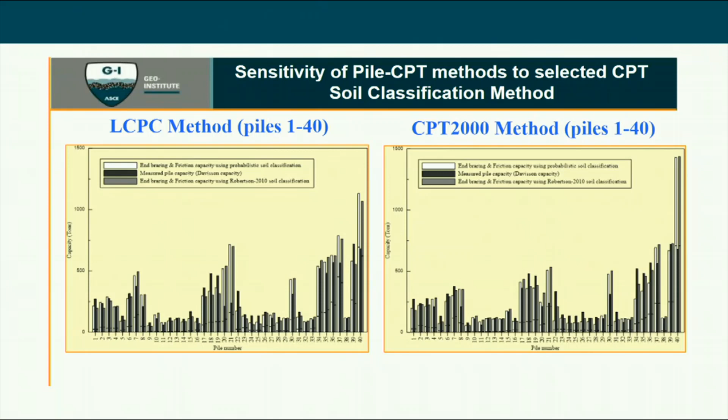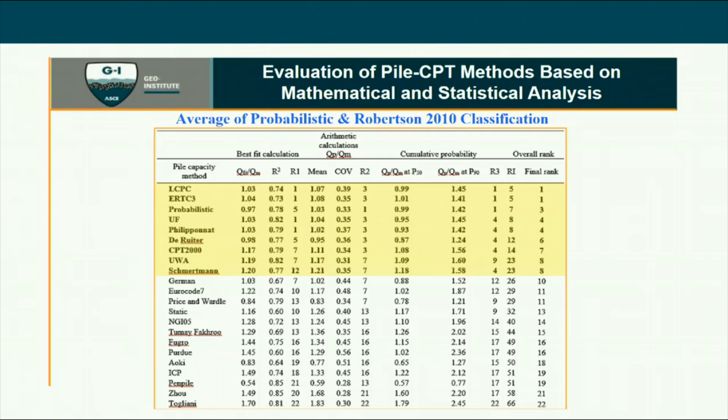This slide summarizes the evaluation using the first criteria, mathematical and statistical analysis. This is not the final ranking or evaluation; it's just based on the first criteria, and we need to add the other 2 criteria to come up with our overall ranking and evaluation of the different Pile-CPT methods. For example, LCPC here gives rank number 1, while Schmertmann is ranked number 8, tied with UWA.

So the second approach, I'm not sure why it's not showing here the text. I have to read from somewhere. So this is the evaluation of... okay, it takes time. Okay, it's animation, okay.

So the multidimensional unfolding, which is another criteria, can be used to evaluate the Pile-CPT method. It's a technique used to display the ranking of these methods or any data in a two-dimensional space. The method helps find out, number one, ranking of Pile-CPT methods; number two, extent of agreement between the piles; and number three, which is most important, similarity between the Pile-CPT methods.

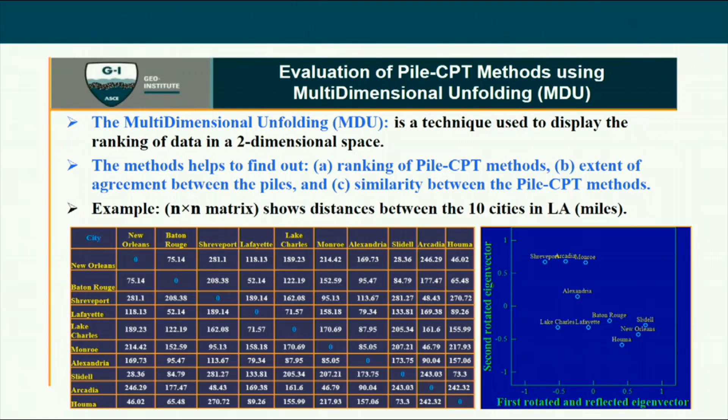An example of that, I'm giving just one here. This matrix, an N by N matrix, shows distance between 10 cities in Louisiana in miles. Using the MDU, with any kind of transformation technique, you can show the location of these 10 cities in a two-dimensional space or map, which represents the actual location or distance between these cities.

So what is the MDU? We need to use a kind of strategy for ordinal dissimilarities. This strategy is called SMACOF, which stands for scaling by majorizing a complicated function. So what usually we do with the data, any data, not necessarily Pile-CPT data.

If we have any data with measured and predicted values, we start with an initial configuration created randomly. Then the distance between the measured and predicted points is calculated as delta. Then we use a kind of optimal monotonic transformation of proximities. Based on this, we calculate optimal scaled data, f sub x. Then the most important step is calculating Kruskal's stress, which evaluates dissimilarities and goodness of fit.

So it's actually a loop technique, like we have to use some kind of reiteration. We do this by minimizing the stress, and a new configuration of data points can be found. We do this until we reach a minimum value of Kruskal's stress. Once we reach this value, we terminate the loop and move to present the data.

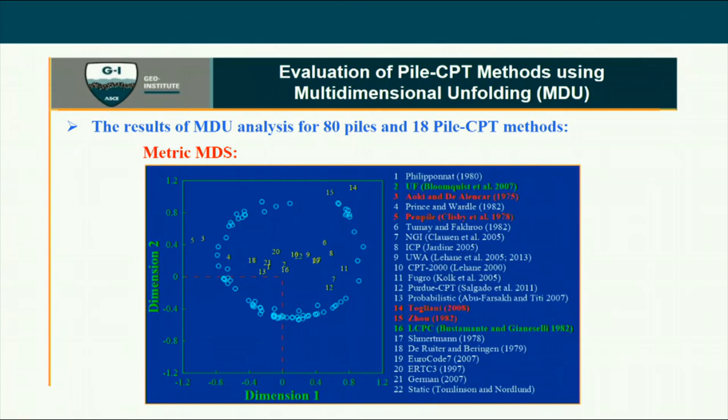I forgot to mention, the light blue circles are the 80 judges or 80 pile load cases, and these numbers are the two-dimensional locations of the different Pile-CPT methods. Based on this, we can see that methods 2 and 16 are the best performing methods based on MDU, and 3, 5, 14, and 15 are the worst.

For example, 10 to the minus 2 gives me a reliability index of 2.33. Reliability index is related to probability of failure: at 2.33, probability of failure is 10 to the minus 2; at 3.09, probability of failure is 10 to the minus 3. So for piles, we adopt reliability index beta equal to 2.33.

There are different methods to calibrate the resistance factors for piles, such as first order second moment, modified first order second moment by McVay, first order reliability method, and Monte Carlo. Usually, first order second moment gives us lower resistance factors compared to other methods, while first order reliability method and Monte Carlo simulation usually give very close resistance factors.

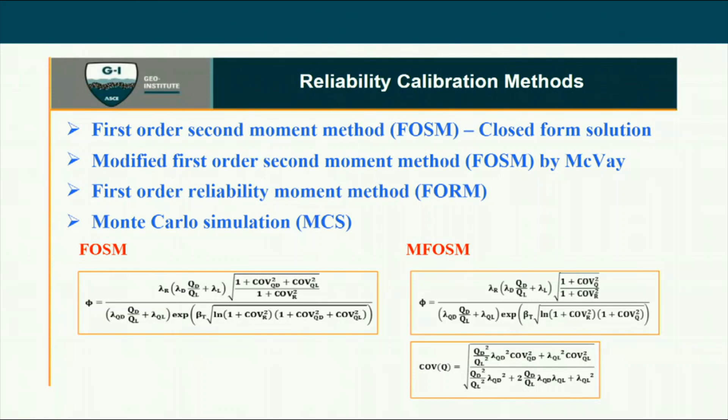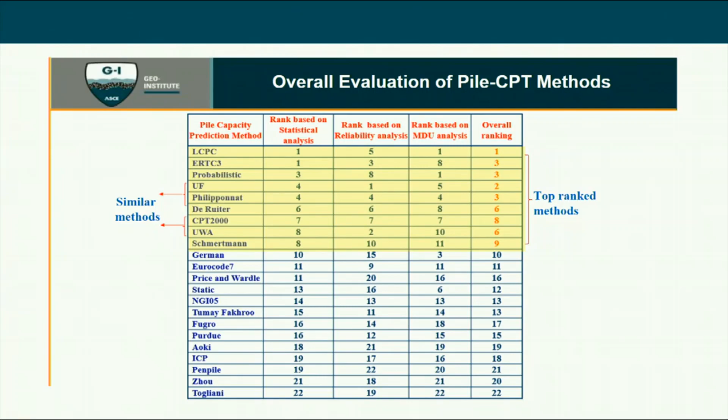As I said earlier, UF and Philipponnat are very similar, and CPT 2000 and UWA are very close. Based on that, we only select one of these two for further development of combined methods.

So an evaluation of Pile-CPT methods: we have an 80 piles database, so we divided it into different categories based on the contribution of sand layers to the total pile capacity. Category 1 is 0 to 25%, category 2 is 25 to 50%, category 3 is 50 to 75%, category 4 is 75 to 100%, and we also did one category using all of these piles.

The first step is evaluating the different Pile-CPT methods based on soil category, from category 1 to category 4, and comparing that with all piles, similar to what we did before.

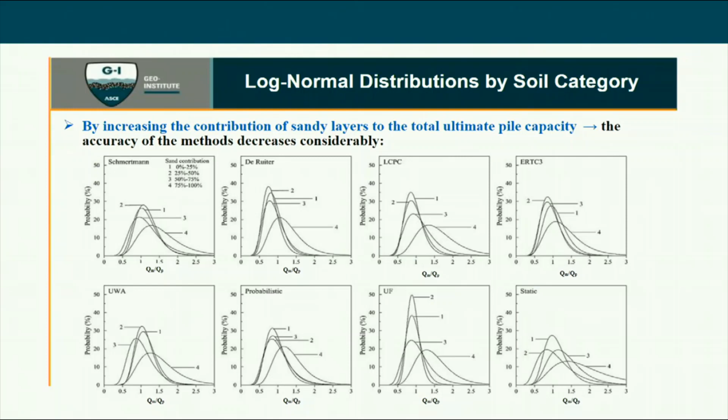This shows the log normal distribution for each method based on soil category. The general observation is that as the contribution of sand layer to the total pile capacity increases, the accuracy of the Pile-CPT methods decreases considerably. So we're trying to optimize here.

We're trying to develop combined Pile-CPT methods. In other words, we're trying to get the benefit of the best of these methods and evaluate one method that gives an optimized capacity based on the top performing Pile-CPT methods.

As we said before, we adapt a log normal distribution to our measured-over-predicted values, or bias factors. For each method, we apply a factor to shift the log normal distribution such that mu ln equals 0, or Q p equals Q m. We multiply each one by a factor, which we later need to optimize, and we combine them together.

If we shift each log normal such that the mean of the logarithmic equals 0 and multiply by a lambda, we end up with a new log normal distribution for each method with mu ln equal to 0, since we shifted it with a certain shift parameter, and our new standard deviation will be equal to lambda times sigma, the standard deviation we multiply each method with.

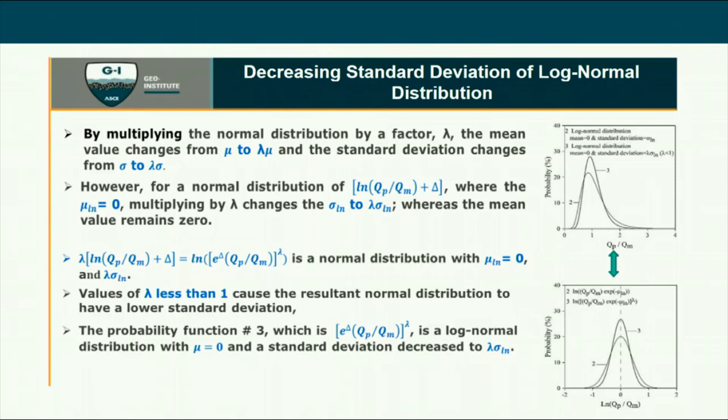Any combination of different log normal distributions will give a new log normal distribution with a new mean equal to the summation of the factor multiplied by the mean for each method, and the standard deviation squared will be the summation of the factor per method times the standard deviation per method squared.

In our case, since we shift everything to 0, our mean equals 0. So if we have, for example, a combination of two methods only, our new mu will equal 0, and our new sigma will be sigma 1 squared plus sigma 2 squared, to the power one half.

We went back to our methods, and as I said, we evaluated using 3 different criteria, the top performance methods. We select, for example, UF instead of and exclude Fugro since they are similar, and we use UWA and exclude CPT 2000 since they are similar, ending up with 7 different methods: Schmertmann, De Ruiter, LCPC, ERTC3, UWA, probabilistic, and UF.

We did the same thing we did before, so we'll have in this case a linear combination of 7 Pile-CPT methods. Each one will have a log normal distribution. Each one is shifted to be 0, with standard deviation shifted accordingly, and then multiplied by a factor.

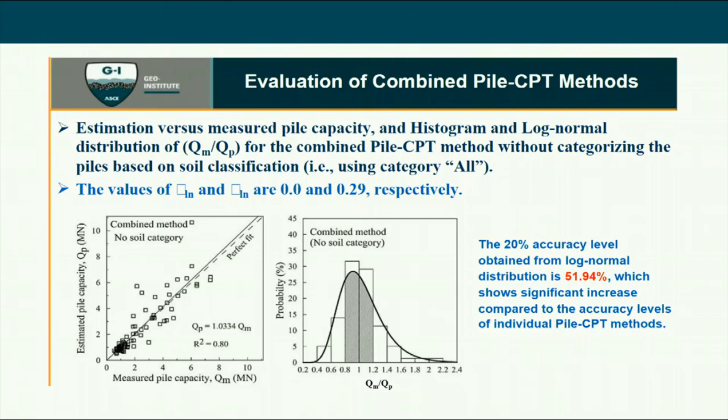The second slide compares predicted versus measured, but for all piles, no categories. For this one, again we're getting Qp equal 1.03 Qm, so a little bit less accuracy than when we categorize using the contribution of sand layers. The mean of ln equals 0, and the standard deviation of the data equals 0.29, and the 20% accuracy within the log normal distribution in the histogram came to be 51.94.

So once we finalized and optimized the parameters to combine the methods, we're trying to evaluate the two different approaches - one combined using soil categories and one combined without using soil categories - and compare those with the top performed methods from Schmertmann to UF.

In terms of resistance factors, phi, the combined method is 0.67, 0.69, while the other methods like De Ruiter actually reach 0.69, but in general the resistance factor is higher than for the individual methods. And the most important thing is the efficiency: the efficiency of the combined method is 0.64, 0.66, which is higher than the efficiency of the individual methods.

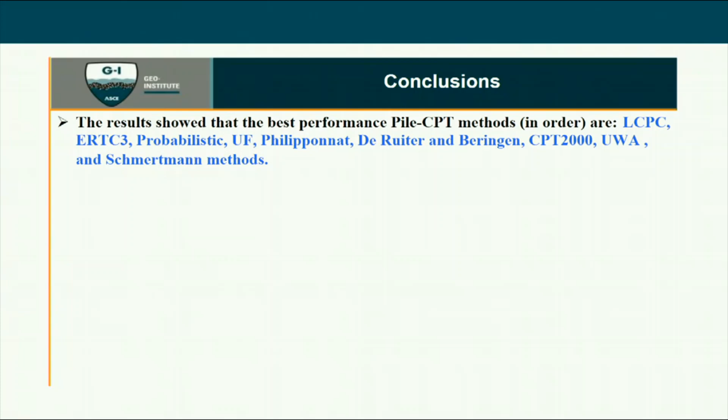So in conclusion, I can say that the results of evaluation of 21 direct Pile-CPT methods resulted in the best performed methods being in the order: LCPC, ERTC3, probabilistic, UF, Philipponnat, De Ruiter and Beringen, CPT 2000, UWA, and Schmertmann methods.

Evaluation of Pile-CPT methods based on soil categories, categorizing based on the contribution of sandy layers to the total pile capacity, showed that the performance of these methods differs for different soil categories, whether from 0 to 25%, up to 75% to 100%.

This is mainly due to using different correlation equations between CPT data and pile data for piles in different soil types. Some of these correlations are more accurate in certain soil types compared to others. So in general, increasing the sand contribution to the total pile capacity results in under-predicting the total pile capacity and increasing the standard deviation, which is actually the error.

The evaluation results showed that the developed combined method has significant improvement in the accuracy of estimating the ultimate pile capacity, especially for piles in soil category number 4, which is piles with more than 75% of their total capacity due to sandy layers.

And lastly, reliability analysis using Monte Carlo simulation also demonstrated the advantage of using the combined Pile-CPT methods, with or without soil categories, in terms of increasing the resistance factors and also improving the efficiency, phi over lambda R.